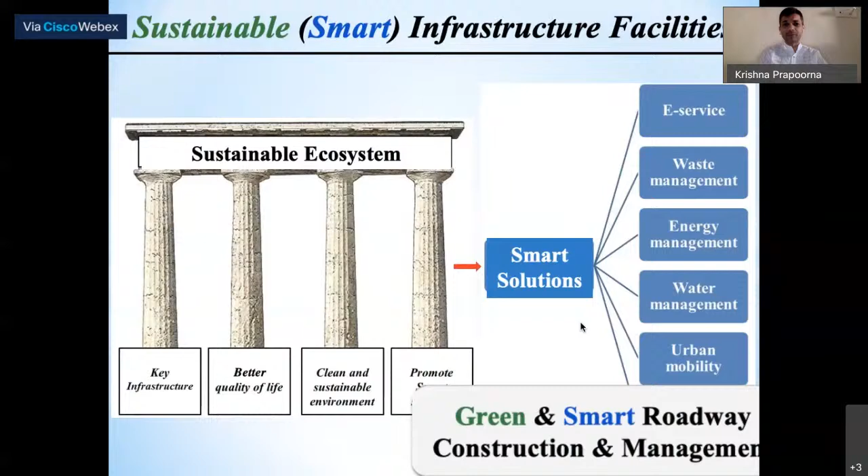And one of the other things is the transportation, where there are two important aspects. One is the mobility, that's the transportation traffic side. The other is the infrastructure or the material side, right? So there are two important aspects. So this presentation will talk only about the roadway asset management and the construction aspect. So we call that green and smart. So this presentation will only concentrate on this, not on the other things.

So I just thought I should share with you our group. So if you have time, please visit our website. We have a vibrant group. We have more than about 10-15 students now working together on several advanced pavement systems research areas. Okay, you can see our lab is well suited to do fundamental research, where we can do binder testing, aggregates, and also the mixtures, advanced mixtures.

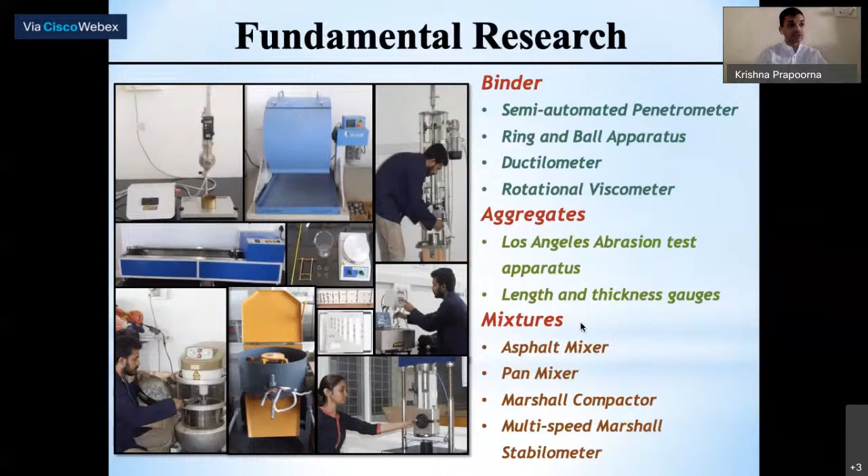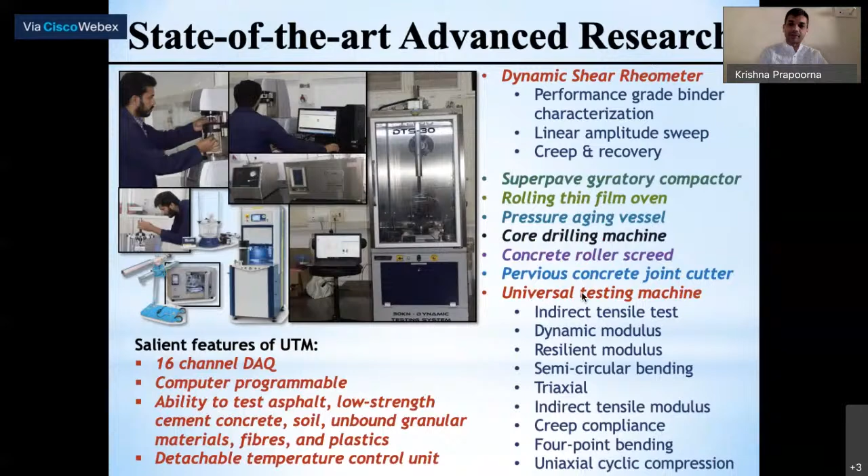We are coming up with several state-of-the-art products. Okay, when you look at the state-of-the-art advanced research, we have some of the best equipment in the country right now, and we are able to do all kinds of experiments, may it be tensile, compressive, fracture, fatigue, many other things. Okay, we also have come up with several research areas that you can see here.

Okay, one of the things that you are able to see here is the vehicle pavement interaction that we are currently working on with NHAI, National Highways Authority of India. And it's a larger project. It's a pan-India project that we are trying to do. We are also collaborating with several other academic institutions.

Then the other one is the environmental concern. That's something that's very close to my heart, because we have been working on this warm mix asphalt. We've also been developing some good products, which also will encompass rubberized asphalt, which I show you here, the asphalt rubber. That's something that I've been familiar with over the last 15-16 years now.

The other thing, of the two important aspects, one is the pervious concrete. We started all the way at IIT Kharagpur when I was there between 13 and 17. So we have now come up with some new generation pervious concrete products that we can show you a few glimpses of, but you can actually go and look at our own publications where we have more details on these.

The other thing that I thought we should share with you, and what I'll be presenting more within this presentation, is about pavement asset management. Right, we have come up with 5 or 6 modules using the deep learning techniques and also image processing. So they're all automated now. So we have been working very closely with the Andhra Pradesh State Road Development Corporation, APRDC.

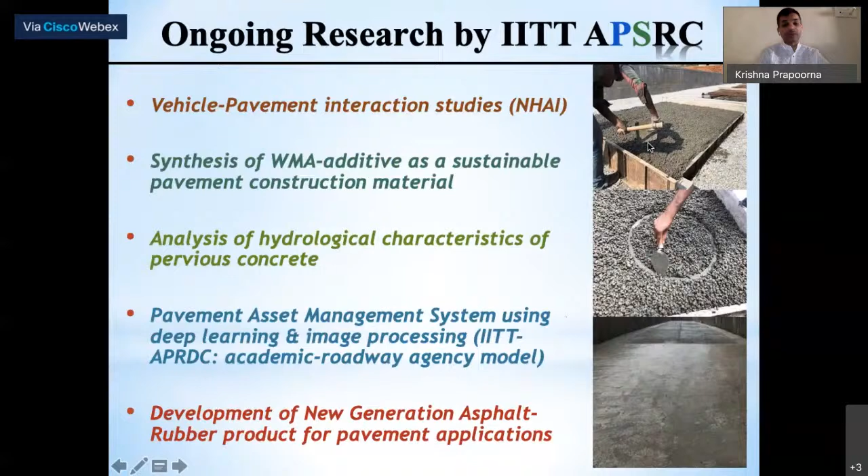So you can see some of the good pictures from our own products that we have placed on campus at IIT Tirupati. In fact, we made a small presentation last year in one of the other events on pervious concrete. So now coming to the conferences that IIT Tirupati is hosting, one that's coming up in 2024 is rubberized asphalt rubber. It's on the new products using rubber-based binders, asphalt binders. That will be hosted by us. IIT Tirupati will host it.

Then one of the other things is the international conference on smart cities. That will also be in India in 2023. One that's coming up very soon is in May this year, May 28, 29, 30. I'll share with you the next slide where you can see there are at least 30 countries participating across the spectrum. So what we are doing right now is to have good collaboration with the industry. We have APRDC, we also have CRRI folks with us, and many other centers collaborating with us.

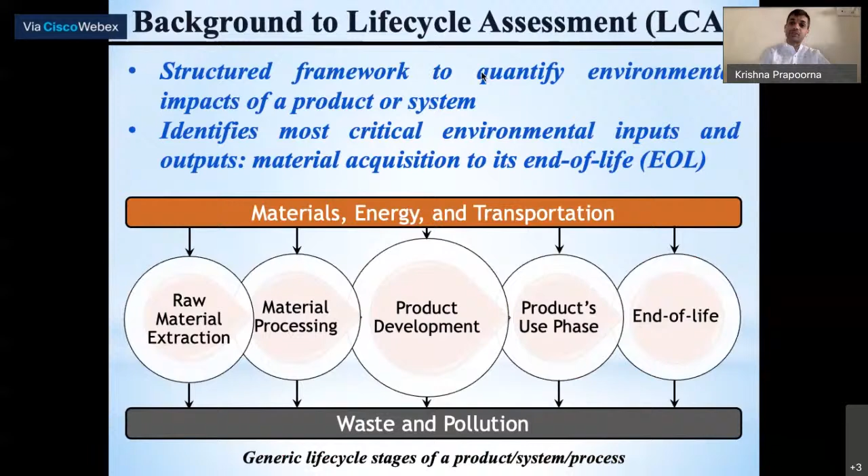So when you come up with a product, we should make sure that we also talk about the life cycle, right? Okay, so it's basically a structured framework that we created, and we were able to quantify. So that's something important. We were able to quantify in terms of numbers, so you could compare between the products, right? So if you look at these life cycle phases, there are 4 important things.

One, we have to be defining the problem, so we know what we really want from the outcome, right? So you need to be coming up with boundary conditions. So that's a system boundary, we call it. And then how many stages? So is it cradle to gate or cradle to cradle? So if you are looking at a material that's just being placed versus a material that can be reused after the entire design life, that's what we should be looking at.

And the analysis period. So how long will this product last? It could be 30 years, 20 years, it could be just 2 years. It depends on the product. So I'm just presenting to you a very generic aspect of LCA, okay? And the second thing is the inventory. So that's something very important. All of us have to be very familiar.

I told you in the beginning also, you need to be creating databases that could be used by others. And that should be open source. If that is successful, I think others can actually provide you good ideas, and you can also benefit from that. And you can also be producing new products, new solutions that could be used by others, right?

So you need to be coming up with the inventory. So you need to have that database, data bank, where you can have primary data from what you have done at your own lab, or you could be collecting from secondary sources, right? Which are literature, obviously, repositories. Then the thing that is very important here is the assessment. So is there a process to it? Yeah, so it all goes back to the fundamental principles, science, right?

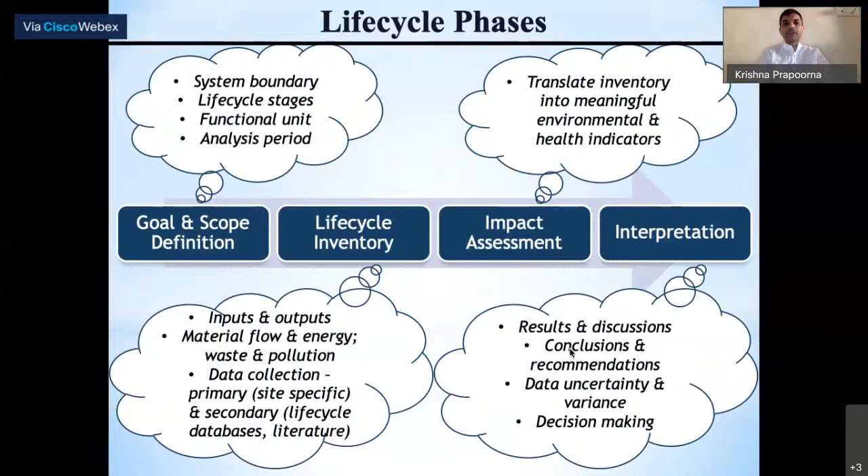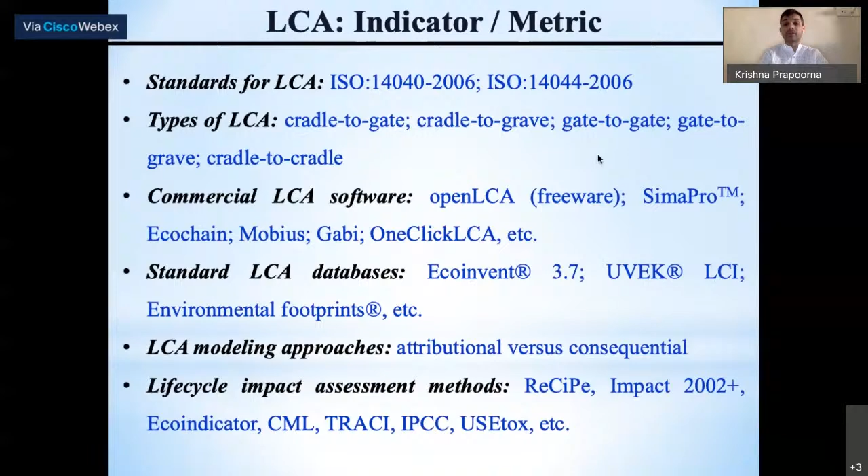So if you look at this, there are several standards for the LCA. I'm not going to talk about this because these are all out there. There are a few open sources. There are a few that you'll have to purchase. Obviously, they're all really expensive, right? So what we thought we should do is to come up with our own toolkit, automate that, so you're able to predict the assessment, right?

If you look at the urban cities, 20 to 40%, in a dense area, it could be even more. And there are two important impacts. One is the urban hydrological aspect, where we will see that there will be a lot of runoff, not too much percolation. We would like to have groundwater recharge, but then there is a lot of runoff going.

Then the other thing is, because of the concrete that's being placed around the city, there is that temperature differential between the urban and the rural setup. And that we call the urban heat island phenomenon, UHI. These are two important research areas for those who are taking this up as research. Please make sure that you target some of the things that are really in dire need.

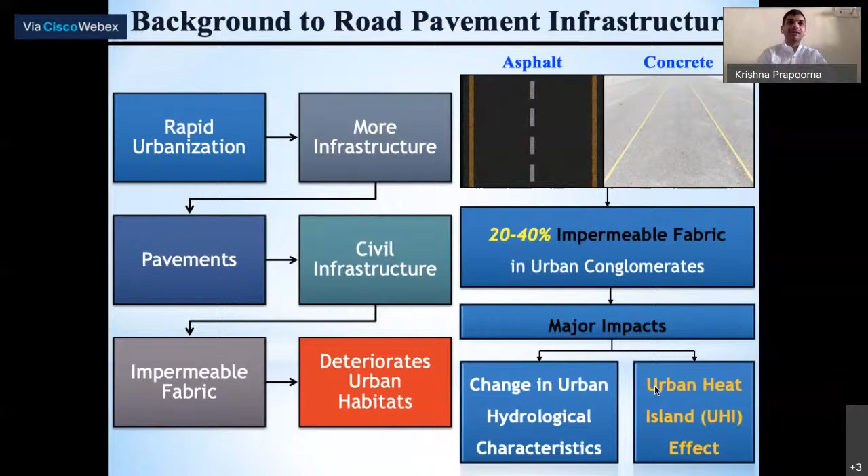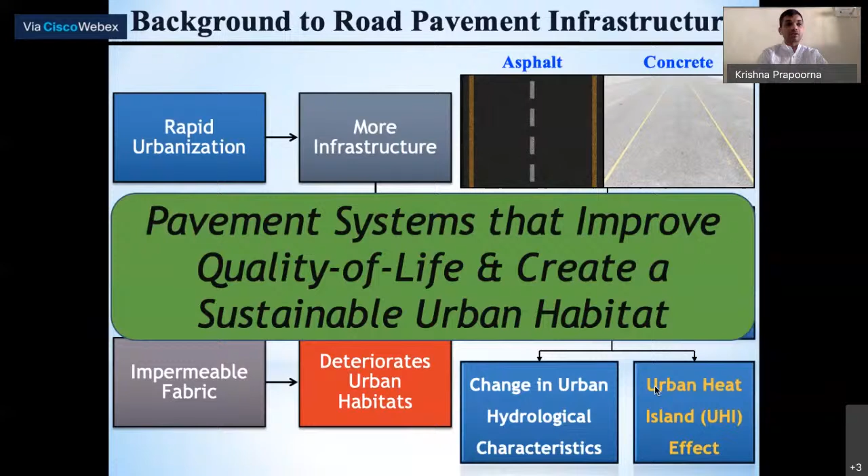So what we would like to create are those pavement systems that can not only improve quality of life, but also make sure that we have good sustainable urban habitat. So pervious concrete, I'm not going to go into details of this, but just to familiarize you. Pervious concrete is basically a specialty concrete, which has, similar to conventional concrete, aggregates in different sizes.

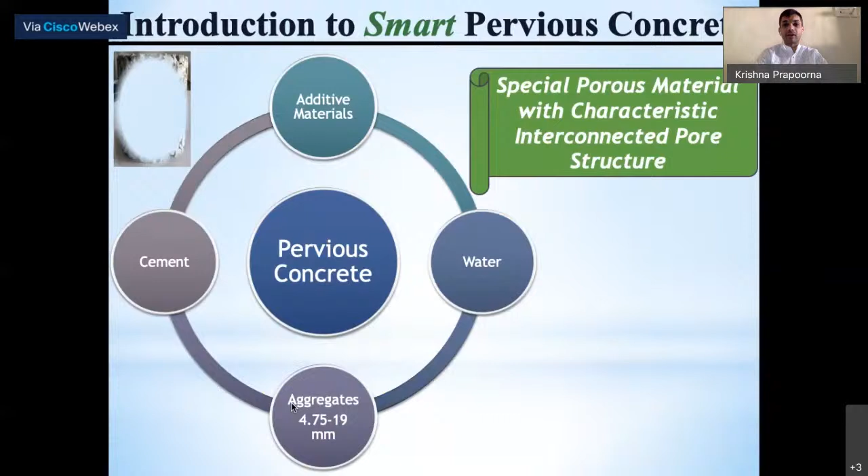But it is a very special material because it has an interconnected pore structure. It has limited or in fact no fines at all. So it's basically larger sized aggregates, which creates more porosity, or what we call void ratio. That 15%, 20% or sometimes 30% porosity is the characteristic feature of pervious concrete. And because of its high porosity, it also has low strength, which means it can only be used in low to medium volume roads at this point of time.

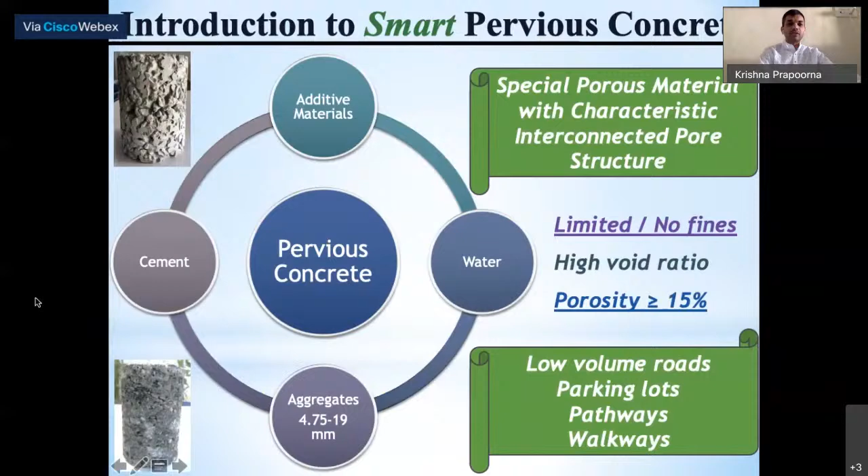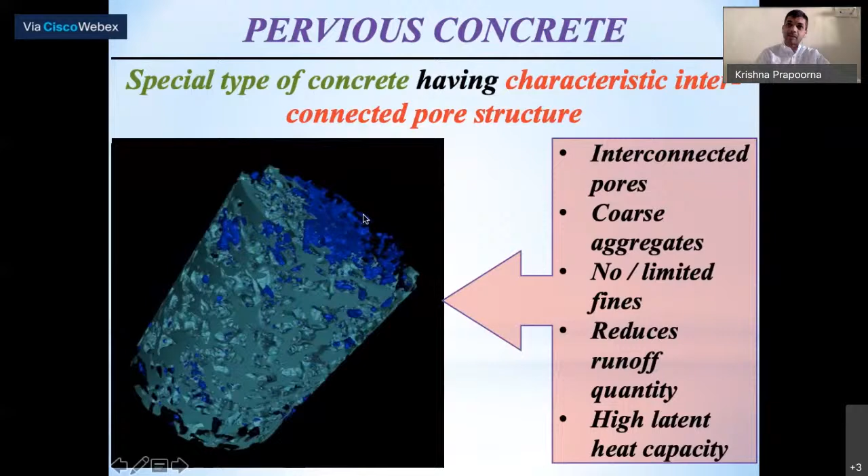There are two different pictures that we are showing from the lab. We have placed some test sections. Because it has an interconnected pore structure, we have done some X-ray microtomography and image processing. We scanned the images and found that the material can get clogged, obviously, because it has high porosity. But literature very clearly indicates that it can only get clogged in the top layer. How much thickness? Probably 1 inch, about 25-30 millimeters.

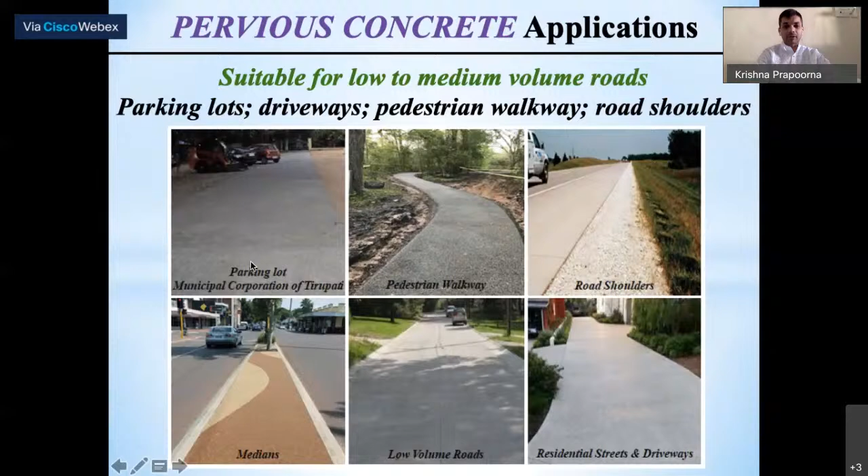Now, this is where we can use the product: low to medium volume roads, for example parking lots, walkways, medians and many other applications. One thing we did as a demonstration is to have a parking lot with pervious concrete on campus at IIT Tirupati. If you happen to come, please visit us. We will show you our sections. We embedded some pipes beneath the layers, and we were able to harness water. It's a published document if you want to read about that.

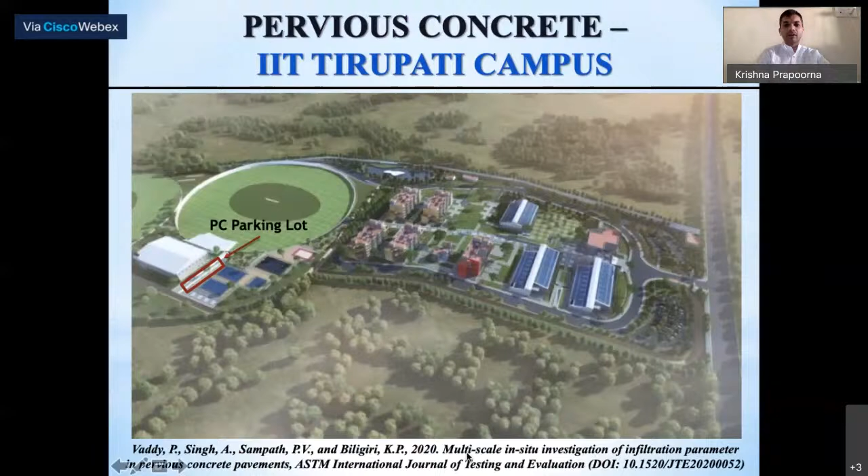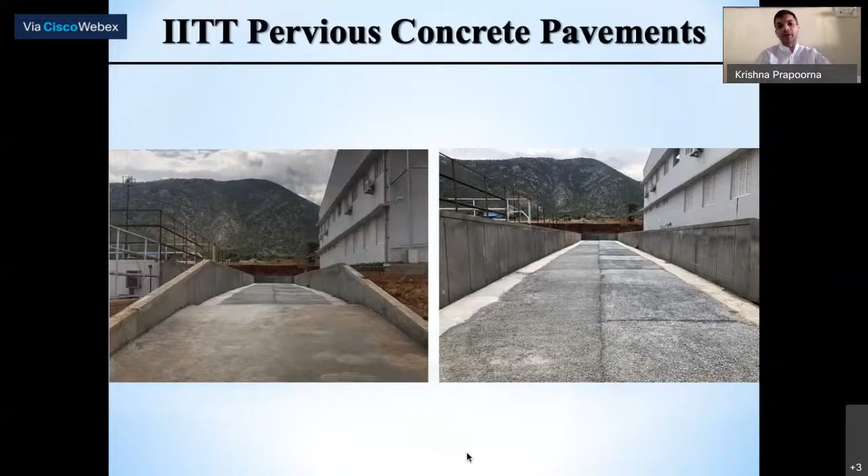Here is the picture where we had a 5 meter width and 15 centimeter thick section, and this is the final product. I'm not going into the details of these. The aim is to show you the LCA toolkit that we have developed. Here is the final product, and it's being used now as a parking lot. We wanted to understand how much emissions and embodied energy are within the product, and compare that with the standard product in the industry and the real field scenario, which is conventional concrete.

So we thought, let's calculate the embodied energy and also the kg CO2 equivalent. So we created a toolkit. It's an automated toolkit, and it goes back to the fundamental principles I told you about. You can go to open source software tools, or you can purchase LCA software that can help you calculate all of these.

But we thought we should come up with our own toolkit, because there was no other toolkit for pervious concrete. The idea here was to calculate these and also the capital cost required to place these sections. And we adopted what we call cradle to gate.

When we say cradle to gate, I told you this, that there are 2 or 3 or maybe even more: cradle to gate or cradle to cradle approach. But what we used here was a cradle to gate because we didn't have the end of life for this material, right? We don't know what happens after 8 or 10 years of service. So we approached this cradle to gate.

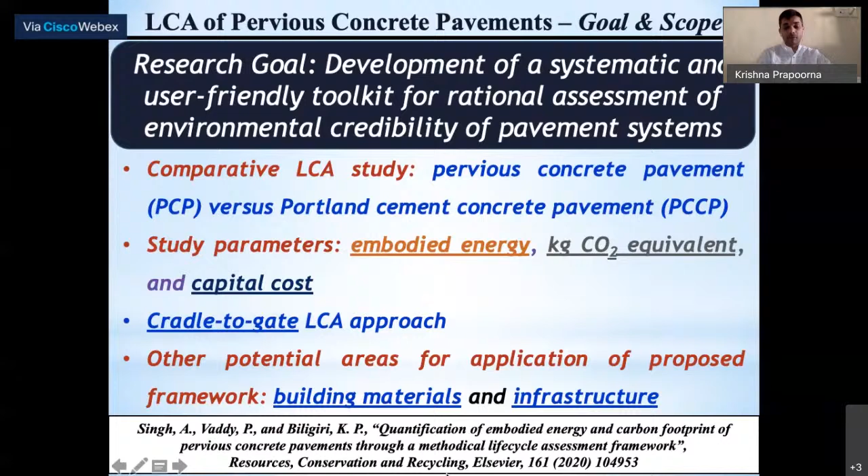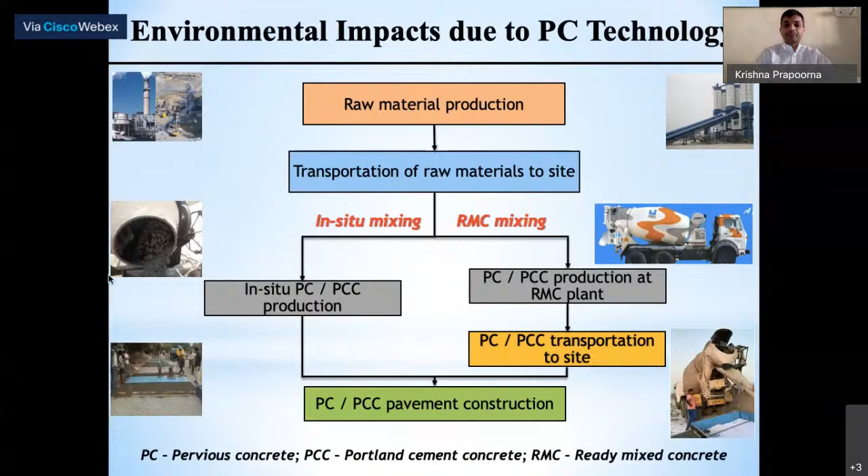So what we did here, you see here, we had this in situ versus the RMC. That is what we were trying to compare. And again, compare 2 different materials. One is a pervious concrete, and the other is the conventional concrete, with 2 different processes that we can create this technology, right? So you can see in the slide, one thing we wanted to have was an extensive amount of data that could be used to create those equations and also calculate.

So we had our construction agency, the contractor, help us with the data. Okay, so the primary thing that we had was the construction agency itself. So we had the contractor help us with the data, raw materials, and then the pervious concrete, and then how much water did they use, what was the water cement ratio, and all those things that we got from them.

The other things that probably we didn't have was the global warming potential, right? And the embodied energy for some of the things that we never could get from the primary source. So Central Pollution Control Board was one of them. Okay, that is a secondary source. And then the material, for example, the ordinary Portland cement that we had, the 53 grade, and then the crushed aggregates. I told you there are different kinds of aggregates that we used, and also it had a range.

Now, the other thing that was important was the target compressive strength. So we targeted an M25, and we were able to achieve that also. So the range of values that was achieved in the field was anywhere between 10 and 25 megapascal. The real field sections I'm talking about. Okay, so we kept this as the target for our calculations. And here you can see there are 4 different scenarios that we were looking at. And I told you we were comparing 2 different mixing methods and 2 different materials, right?

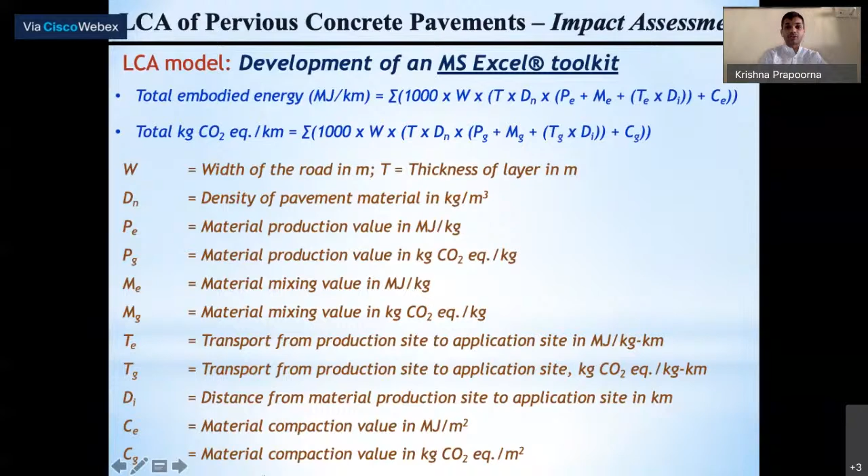And then material properties, so density, and then the production value. Again, these are the values that we either got from the agency or from the secondary data source. So all of these we got from various sources, and then finally we arrived at these simple equations, automated now, right? And if you actually see, all of these are very generic in nature. You should be able to use it for any product of your choice now. That's why I told you in the beginning, this kind of a study that we did was probably aimed at looking at many other building materials as well, right?

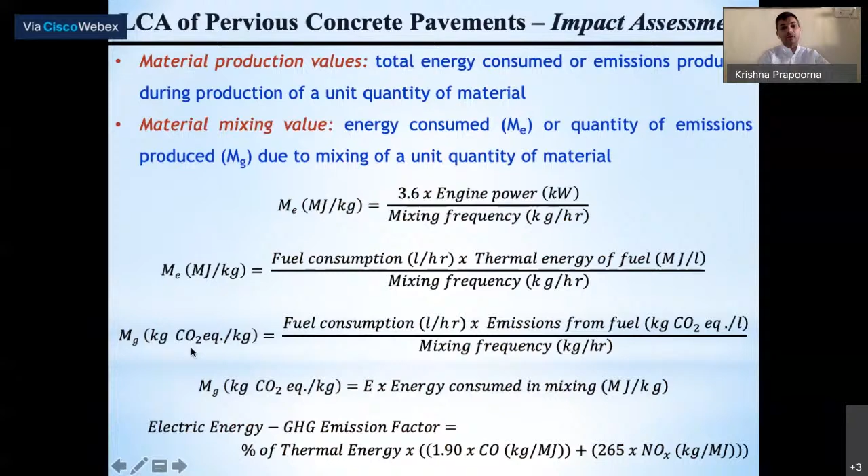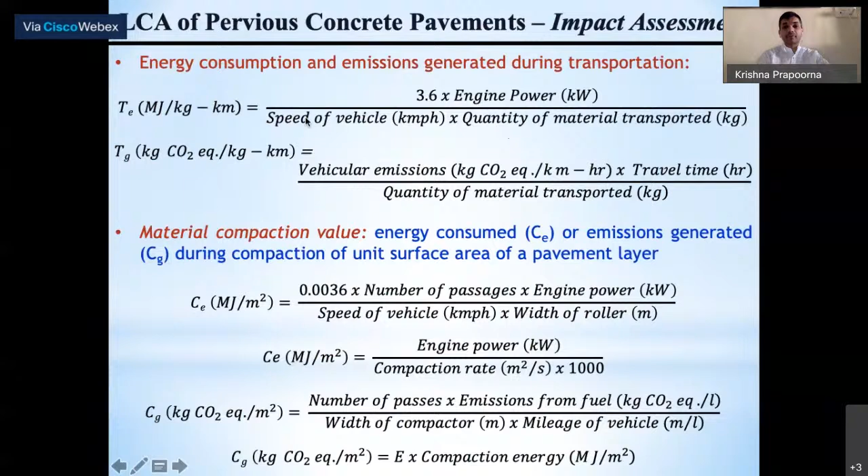So here are some of the things that you might want to look at later. Okay, we also wanted to have the energy consumed calculated, emissions generated, and many other things. You can look at this, all of them are here. Okay, now looking at the results. Now, if you want to interpret the results that we had, there are two important things here.

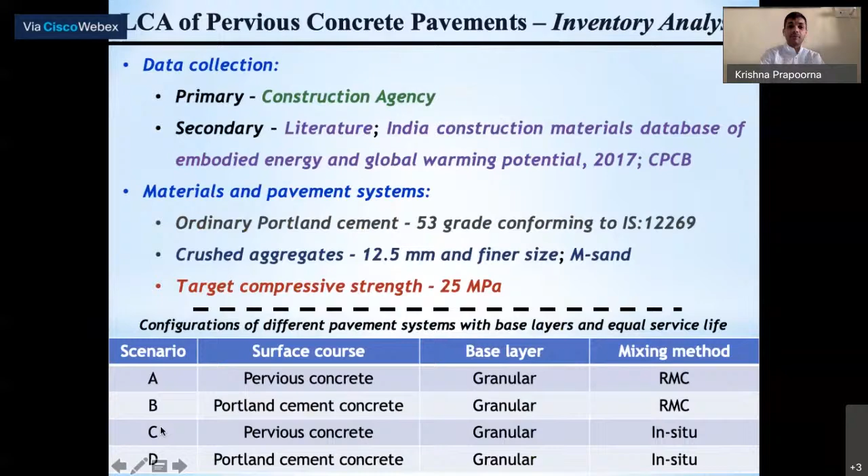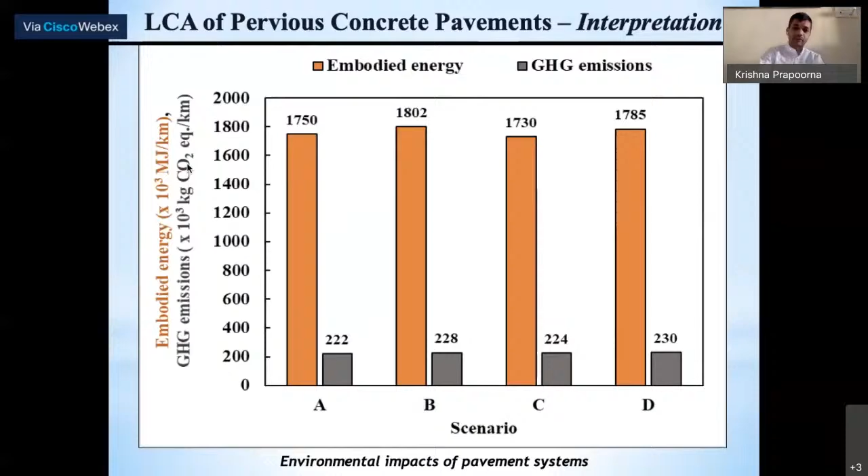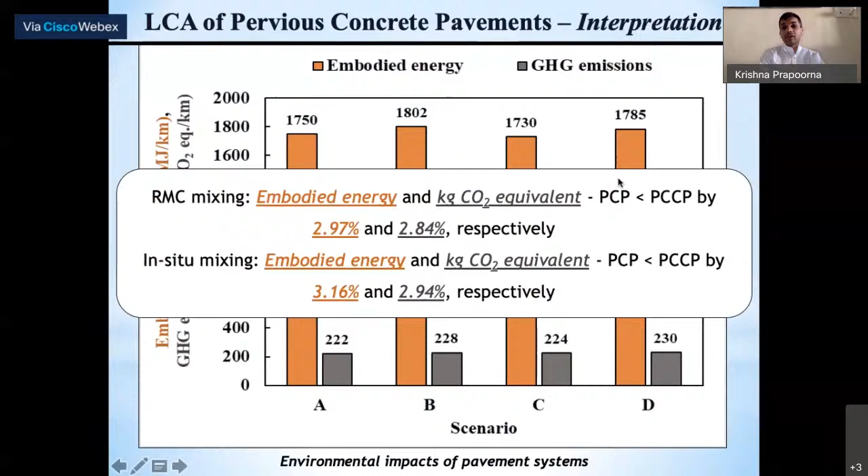Now, coming to sensitivity, because along with the automated toolkit, what you should be doing is to come up with the sensitivity. Which factor is more important than the other? That's something very important, right? We wanted to look at the transportation distance, material production, mixing, compaction, and density. So you are looking at the entire phase, cradle to gate. Now you can extend this to cradle to cradle. If you have the salvage, you can also include that for sensitivity.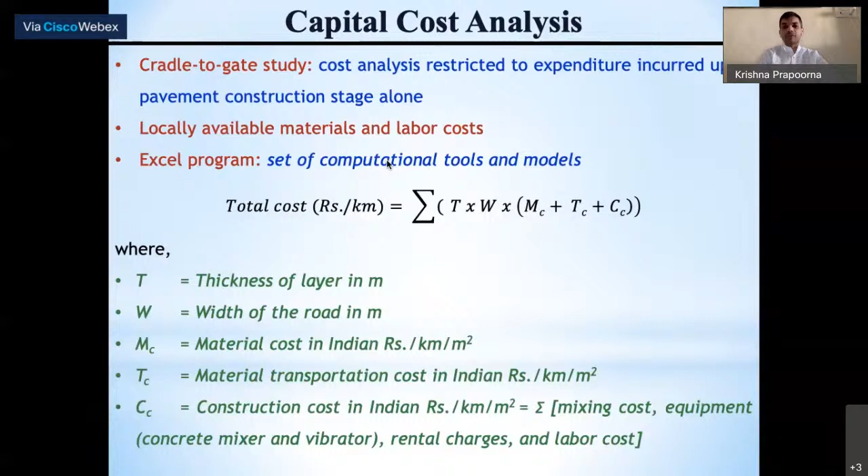So you see again the different parameters that are there. You can modify this; the computational tools can be modified and further refined based on your input. So finally, if you look at this again, A and B RMC, C and D in situ, A and C pervious concrete, B and D cement concrete, right? I'm looking at whatever number I have times 1,000.

Rupees. So you should be able to save a lot of money due to RMC. That's what this says, and that goes by fact, right? So you're able to prove through your toolkit that what is found in the actual market is correct. And that's why I told you, you should be able to create your own toolkit using simple MS Excel also, or maybe even a simple tool other than this. Okay.

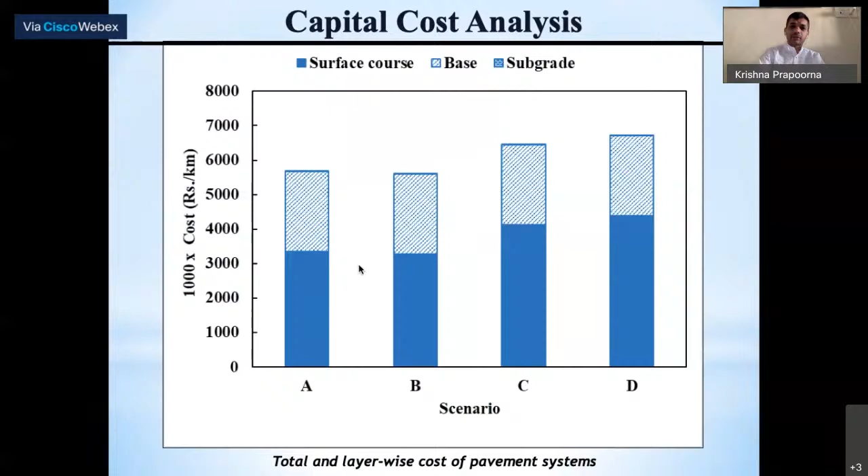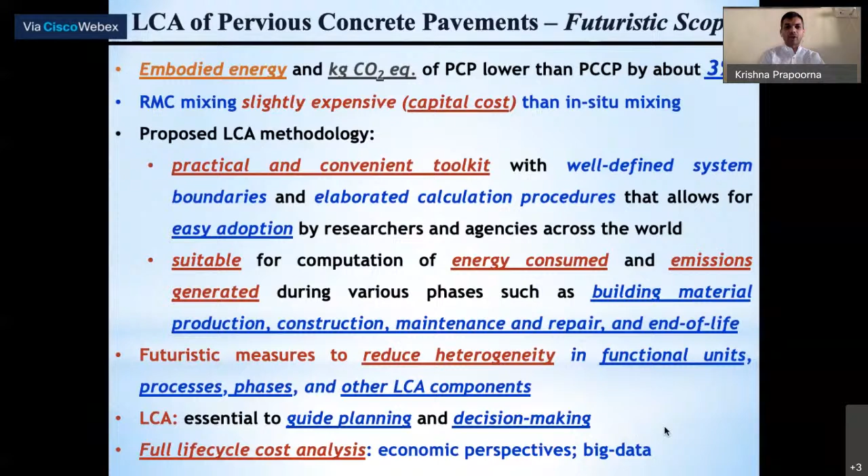So coming back to this again, what we are trying to do with this toolkit is extend this to LCCA. So please work on this, come up with the economic perspectives. Full life cycle cost analysis has to be done on that, right? And that's where the big data comes in. One of the things that we are working on closely with other colleagues right now is to have target mixtures, and use the artificial neural network to calculate and then integrate that with our toolkit. So that's very much possible, right? So this is one thing that I thought I should share with you.

The second thing that probably will be more interesting for all of you is the pavement asset management toolkit, right? And we have now automated all of them. We have about 5 modules that we have come up with, and let me share with you all of those, because, as I told you in the beginning, it's the academia industry model that we're working with. And this toolkit can straight go to the roadway agency and can be used by them.

Now, one of the things that all of us are familiar with is database management, right? If you are not able to have a good database, it's really difficult for others to use this. And one thing that you should understand is manual survey versus automated, right? If you are surveying in the field and you have to do thousands of kilometers, it's laborious and time consuming, right? So an automated system will help us not only to store data, but also reduce the amount of time. So it saves time, but also saves money. And you can simply sophisticate your toolkits with that money, so you're able to invest more on this.

Now, let me just give you a background on pavement asset management. Definitely pavements deteriorate like us, they also age, right? And if you are not addressing the problems that occur during the entire design life, it could be cracking, pothole, rutting, shoving, corrugations, you name it, it's there on road, right? If you're not able to address those on time, not maintain, then what will happen? It'll deteriorate faster than expected. That is what you see here.

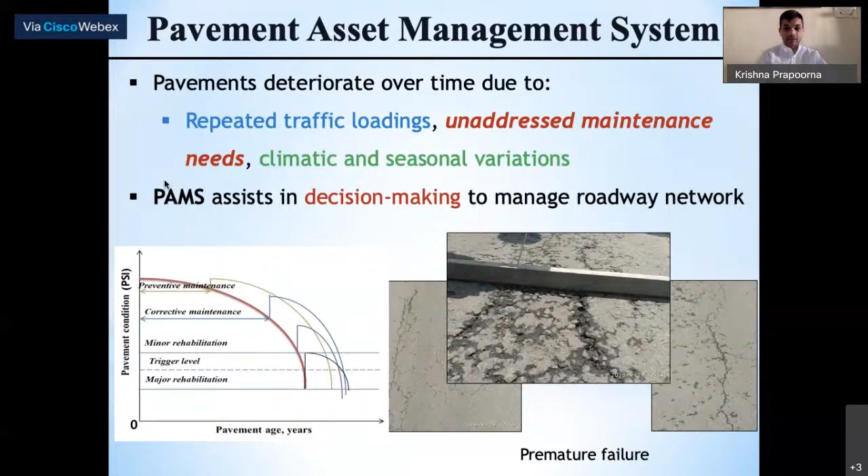One of the things that we haven't done in India yet, at least many states have not done, is to have this kind of road management system database. Even if they have those, they have not automated them and are not capable of predicting the performance. So that's where our automation of these toolkits comes into the picture, right?

So giving you a brief history of PMS, pavement asset management, it all started in the 1950s. The AASHTO road test came up with the serviceability index concept, present serviceability index, which is basically the difference between the initial and the terminal serviceability indices. Then they came up with pavement management systems for highways, and that's a systems engineering approach. They got the survey done, whole to part, right?

So you do the survey, go to the field, get all the data, culminate that into a database, come back, and create a software toolkit that is automated, obviously, that can predict for you the performance of the system. Now, how robust the system is depends on how sophisticated you make the program, right?

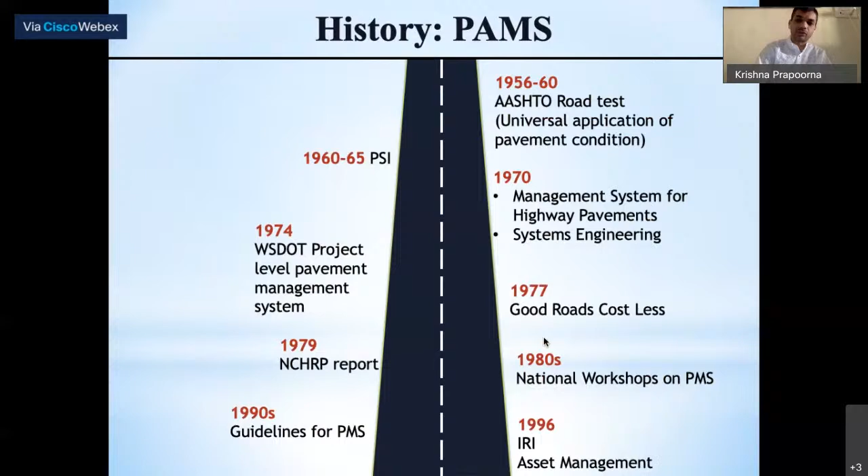So if you look at the overall picture of the PMS and the objectives, right? One, definitely you collect data. It's a circular thing, you see. You collect performance data, right? You see today and then you collect every year for the next 10 to 12 years, or it could be 20 years, it could be seasonal, it could be monthly. You create that database and then you automate that.

You should be able to detect distresses automatically. You cannot go there every time, and you cannot do that for thousands of kilometers, right? You should be able to just get the images or videos through your automated van or vehicle, come back to the office, and detect distresses using tools, right? And then the tool should also be able to analyze. Finally, predict the performance. That also you should be able to do using the tool.

And then come up with the alternate rehabilitation strategies. Not only that, you should go one step further and come up with the cost comparisons. That will help you prioritize and optimize what you would like to do. Finally, implementation. That's where the construction comes into the picture, right? So this is the asset management and the construction. They both have to go hand in hand, right?

So another thing that is important in this asset management is you come up with the alternatives. Your module should be able to do that for us. If you're able to tell the roadway agency, go with this maintenance strategy because this is probably the most appropriate for this section, then you have succeeded in convincing the agency, based on actual data, images, right? This is what we should be using, alternative A instead of alternative B, right?

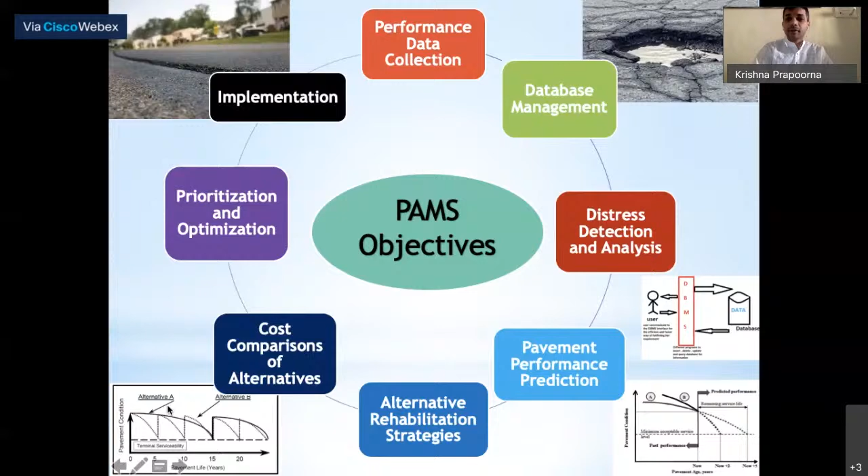So now looking at this picture here, you should be able to come up with the acceptable limits also using your toolkit.

Okay. Finally, you should be able to tell the user, okay, you just have to input this and we will give you the performance prediction. If you're able to do this much, that'd be great.

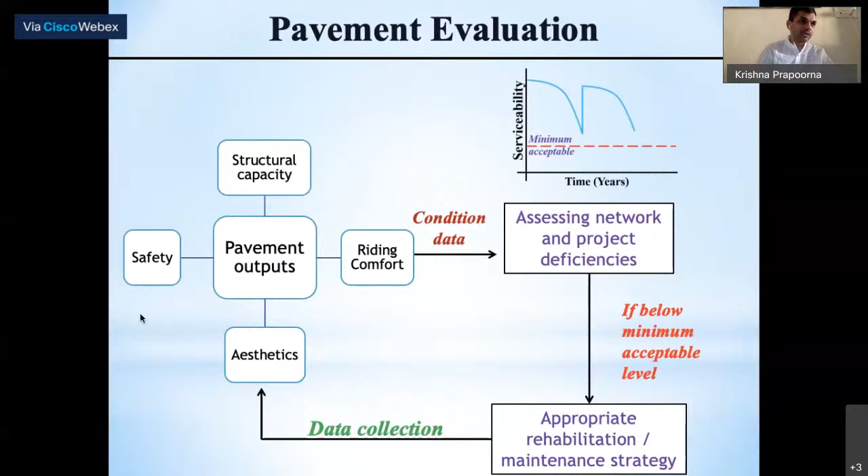So now when you look at the different vans that we have, right? I'm sorry, not the vans, just vehicles that we have. There are different kinds of vehicles across the world to do the condition survey. Okay, there are a few. Manual survey obviously is there with us. Most of us are familiar with this, but then there are automated vans.

There are cameras embedded on the van, on the vehicle, below the vehicle to capture the profiles, right? They're all laser based sometimes, and then also image based, right? So you should be able to get familiarized if you go and Google those.

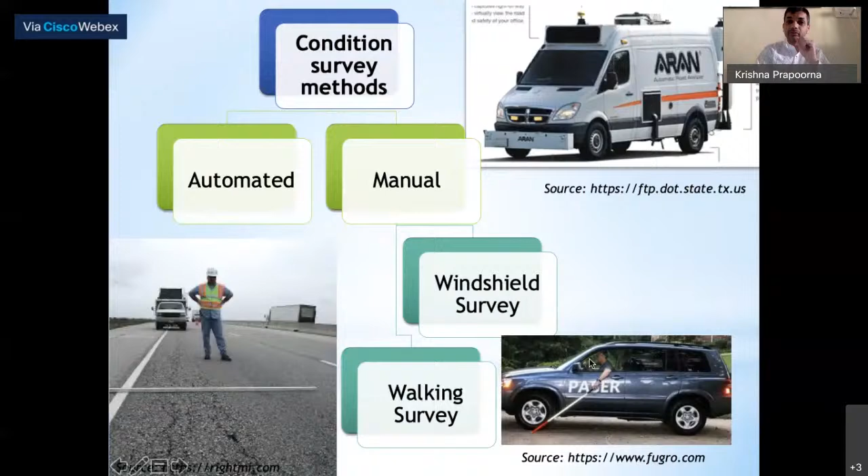Now, one of the things that is there in India and what we have been using, and now coming back to our own work, is the network survey vehicle that is there in India, and that was basically manufactured in Australia. Because you can see here ARRB, the sophistication of the toolkit that's there, which can collect data, not the performance prediction, obviously, that came from ARRB, the Australian Road Research Board.

Okay, and what is the special feature of this van? You see here there are 3 different cameras that are mounted on top of the vehicle, and then there are cameras mounted below the vehicle also that can capture the pavement profile.

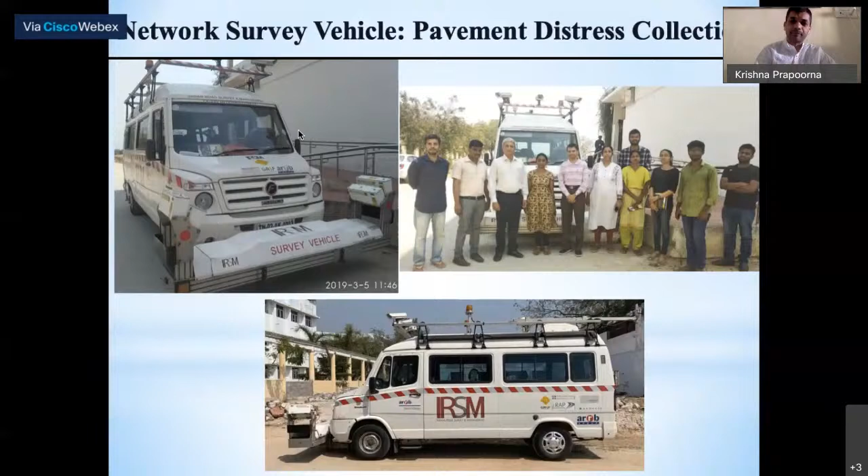So we have data coming from AP state, Andhra Pradesh, almost 13 to 14 lakh data points. So they gave us this much data. So we are now closely working with them and giving them the toolkit that we are developing. Okay, and you see here what are the things that they have done. They have basically captured all kinds of distresses. Fatigue cracking, pothole, rutting, shoving, bleeding, many other things.

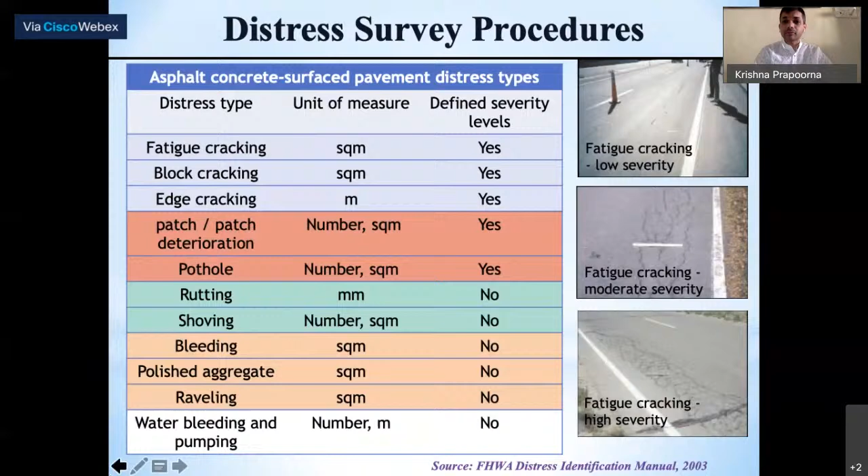How are they able to capture that? I told you, not just based on the manual survey, but also due to the automated one. So that is able to capture that.

Now, if you really want to understand what pavement asset management is all about, please go to one of the papers that we just published recently in Automation in Construction journal. One of my students actually did this. She's now finishing up a PhD. And one thing she was also successful in is creating different modules within pavement asset management, right? And there are about 3 or 4 things that I thought I should share with you.

One thing is we were successful in detecting potholes using the artificial neural network, and quantifying the amount of material that is required to patch the pothole. Second thing is a very large scale study that we did using 3 different data sets across 3 continents, and I'll share that with you also. So we are able to predict several distresses at the same time.

And we are able to predict real-time distresses if you use any vehicle for that matter, not just the NSV that I showed you. You should be able to go out in the field, capture the video, come back and use our toolkit. Automatically, it will detect for you all kinds of distresses, approximately 18 of them.

The third thing that I thought I'll share with you is engineering criteria-based pavement condition index. That's something important because most of us are familiar with manual. You go there, you take a paper and pen, you do that. It's good if you have 10, 15, 20 kilometers or maybe maximum 100, with enough manpower.

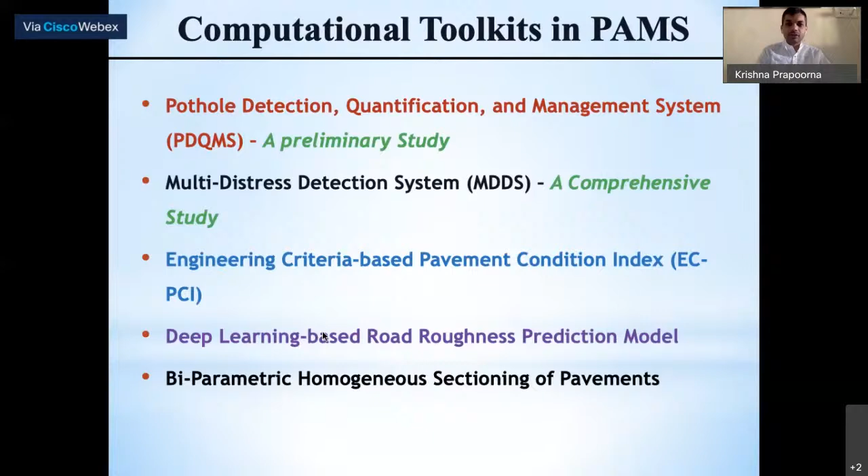So the first thing that I thought I'll share with you is the PDQMS, pothole detection, quantification, and maintenance management system.

That is a published document. If you want to know more about it, please let me know. We will share with you. One thing you people are very familiar with, all of us, right? Potholes are definitely detrimental, and they can probably create accidents. I'm just saying probably, because there are a few potholes that will not, but there are a few extreme ones that can definitely do that for you.

So you should be able to predict the pothole, right, using images. That is what we should be able to do using automation. That is the first objective that we had. So we wanted to predict the pothole and also come up with the amount of material that is required to patch these potholes. So I'll not go into details of what a pothole is, because all of us are familiar. So it's a published document there.

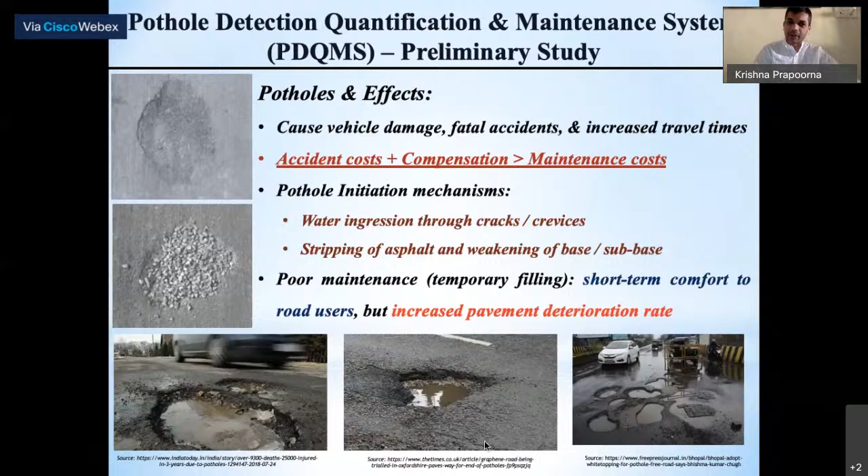So we created a framework using You Only Look Once. This is an open source software. Okay, it's version 3. So what we did, we created an architecture based on images that we collected. Okay, it could be colored or grayscale, no problem. So we collected the data set, and then we created an architecture in the open source YOLO, and we segmented those potholes from the images.

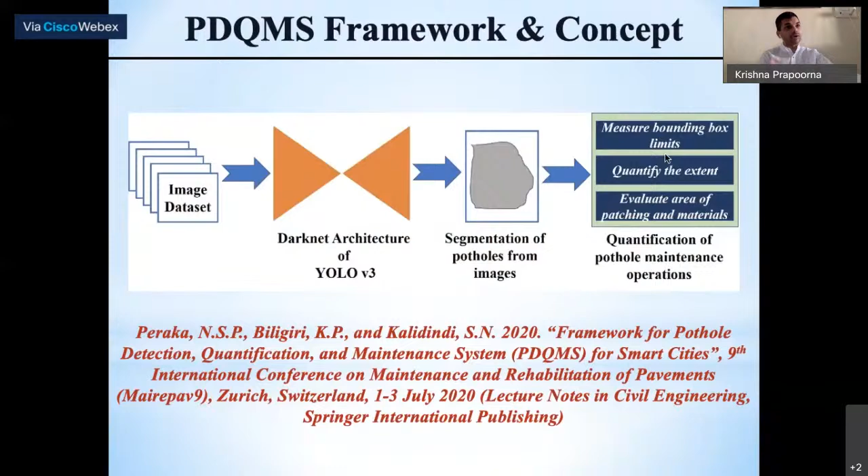So you have an image, and you might have 3 or 4 potholes, but your toolkit should be able to automatically detect the bounding boxes, the boundaries, right? So we were able to do that, and then the quantification of the extent of pothole. So not only severity of the pothole, which means depth of the pothole, but also the extent of pothole, which means length and the width. Finally, come up with the quantification, right? So here is the slide that can give you more information.

So we had different depths of potholes. I told you just a while ago, right? And what we did, we classified those, and we labeled those into 3 different classes. So we had 9 different classes to start with, and then we came up with 3 important ones: low severity, medium severity, high severity. So these are the labeling. So our automatic network is able to not just detect the pothole, but also label the class. So that much we were successful.

So you see here, the procedure is as follows. So you have the original image coming from the roadway section. Okay, you can use an NSV to do this. So you go to the field, you capture this image, come back, pre-process it. Why is pre-processing required? Because you need to convert those to the desired pixels, right? Okay, and then, another way of looking at it, you have this image. You see here, this is the pothole. I don't know if you're able to see this. This is the one that I should be able to capture. You have to create that bounding limit, right?

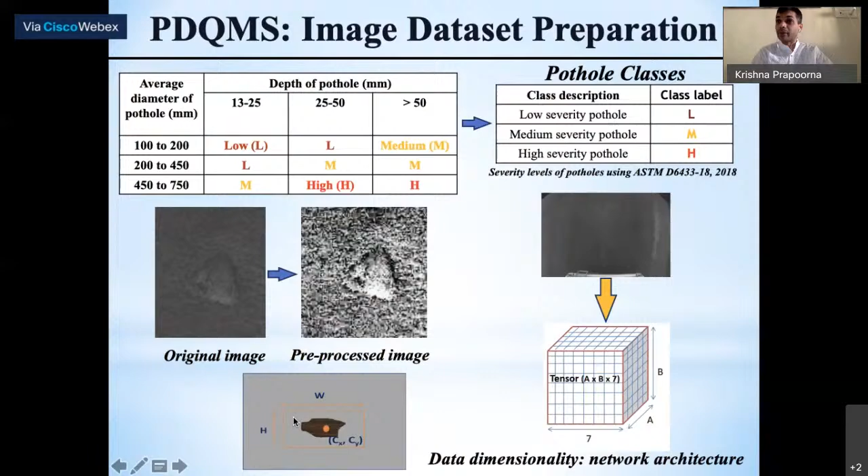So we use a tensor quantity there. So it's a data dimensionality, in the network architecture itself. And then we finally came up with the width and the length of the pothole along with the depth of the pothole. 3-dimensional, right? So here you see another way of looking at it. So we got this image from the database. Here is a pothole, you can see that. So put that into the architecture.

So it basically takes up the image, and then there are different layers. What it does, it simply creates that bounding box around this pothole and labels it. If you see here, it says L, which basically means low severity pothole. Okay, if it were M, it would be medium severity. H, high severity, right? So it's able to predict that using the architecture and the fundamental principles that we used. And finally, it simply gives us the bounding box and the pothole here. You see, that's what it gives.

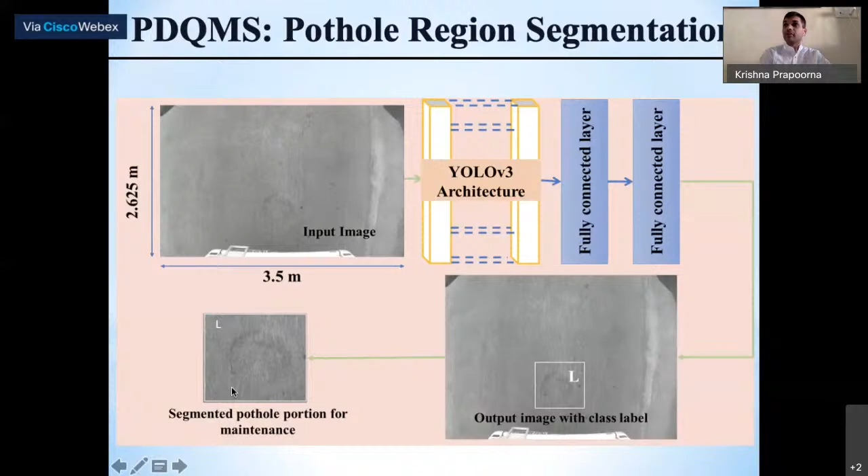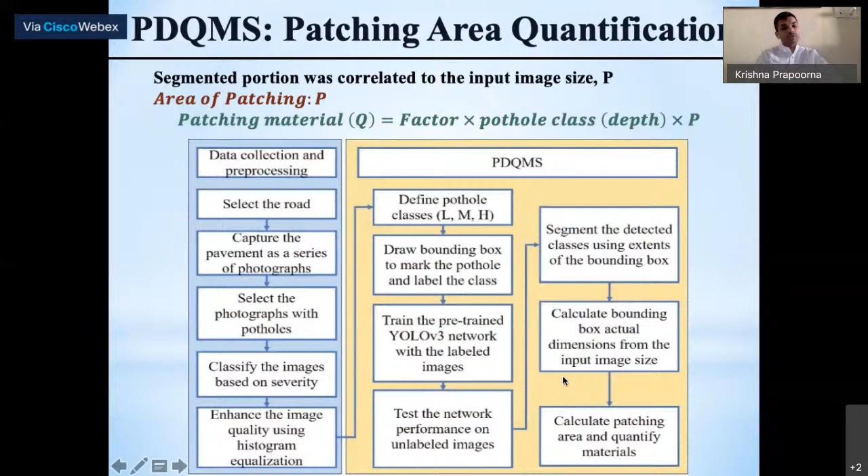And then you should be able to calculate the amount of material that is required to patch this pothole. So here is what we did. These are the chronological steps that we followed to get into the pothole patching there. Okay, and then looking at the results, the statistical parameters. How confident are we with our product? Look at this. The mean average precision is very high. In fact, 89% plus. It's slightly higher than the existing one.

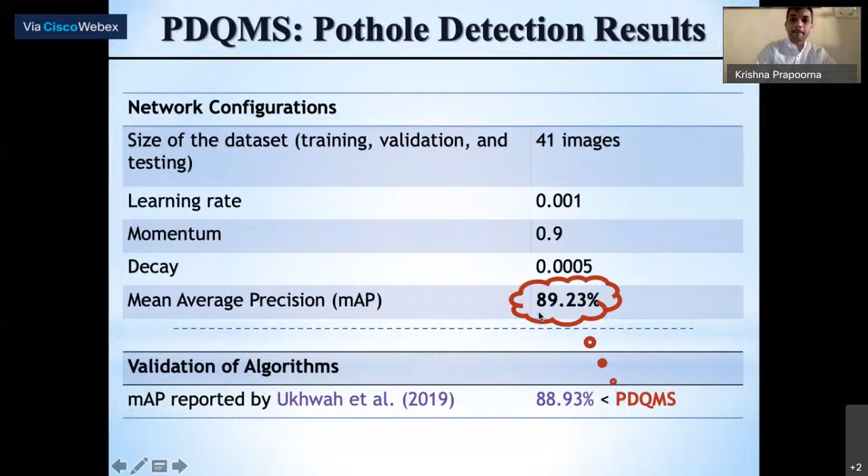Okay, in literature. So we used about 41 images. Now we have probably gone even beyond that. I'm not going to share that with you because it's still not published. But we have trained, validated, and tested on 41 images. That's something that you should be familiar with. And you can see here, this is really very high, right? Okay. Now, the next thing that I thought I should share with you is the multi-distress detection system. And I told you this is a massive work that we did for the state.

Now, we were able to detect 6 different types of distresses and 3 different severities, which means 6 times 3, 18. 18 different distress classes automatically, right? And what we did, we used YOLO version 4. Again, it's an open source software. It's one step advanced than what we did for the pothole detection. That was version 3. This is version 4.

We trained and validated on diverse data sets. Again, I'm going to share with you the different data sets that we used, and it was able to detect real-time videos also. So if you're using this toolkit, you run your video into the architecture, not just image but also the video, you should be able to detect different distresses at very high computation rate.

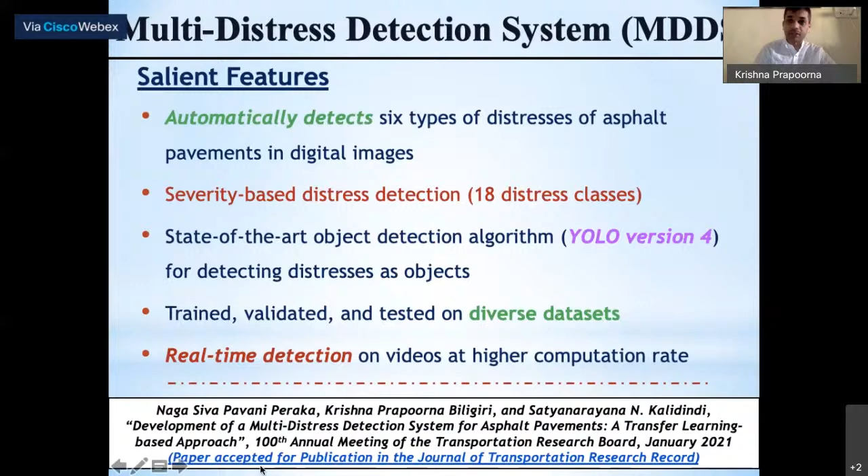It's a published document now. It was presented in the Transportation Research Board meeting, and it's a published document in the Journal of Transportation Research Record. It was accepted. It's now getting published very soon, maybe in the next one or 2 months.

Okay. So what we did, you see here, this is what I thought I should share with you. So there are 3 important things. One is the passenger side camera, front, and the driver. There is also one more, which I'm not able to show you here, the one that is below the vehicle. Okay. So apart from these 3 that we got, videos and images, videograph we call it, right?

We also got this information from the APRDC. Distress rating forms that we got, different distresses that they thought were there based on the survey of about 50-60,000 kilometers using the NSV, and the other indices, deflections and the trial pit studies and so forth.

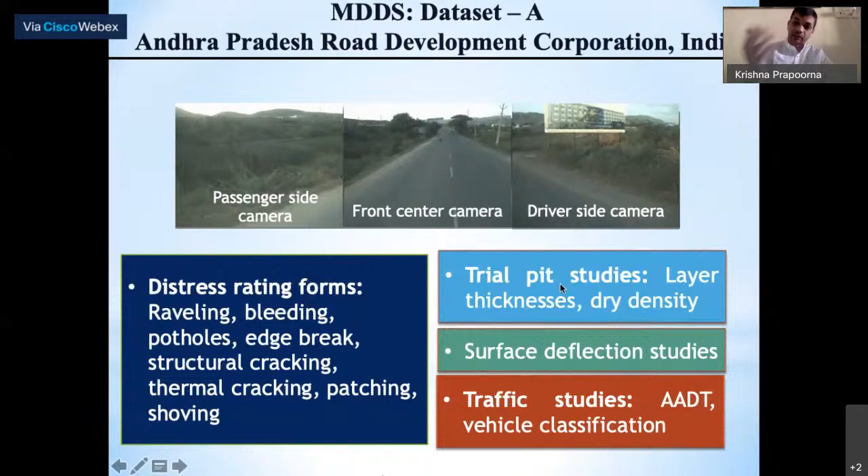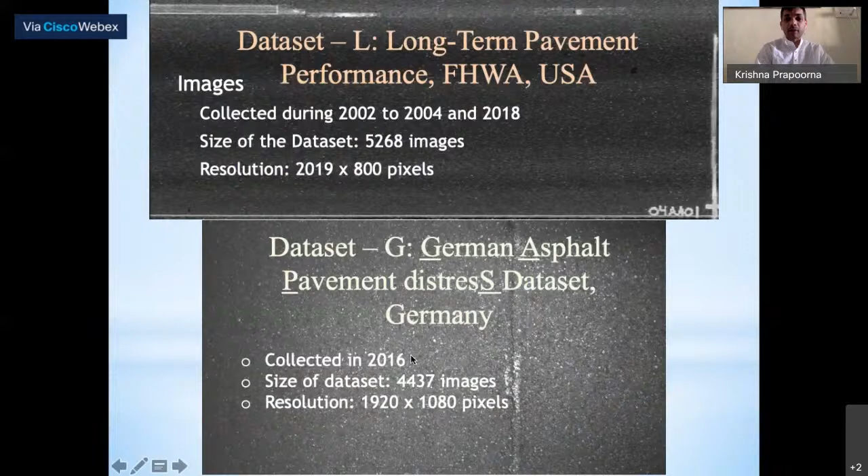Okay. And 3 different data sets that we used. One was the long-term pavement performance database coming from the Federal Highway Administration. So there were about 5,200 images, all the way collected from 2002 until 2018. And then the other one is an open source German asphalt pavement distress dataset from Germany. About 4,000 plus images here.

And the other thing is our own APRDC images. It was about 100,000 images, and the number of images that had potholes, the distresses, were about 800. Okay, so in total we had about 1,500 images to work with from a large pool of data set.

What we did, we pre-processed all of these videos and images. We filtered those. We converted the colored ones to gray. We filtered those again. It could be video, it could be an image coming from the data set, it could be both. Whatever is the case, you first have to convert those to gray, pre-processing, that's what we call it. And then we enhance the image for the network architecture to read it. That's something important. So we worked with these 1,500 images, and this is what we got.

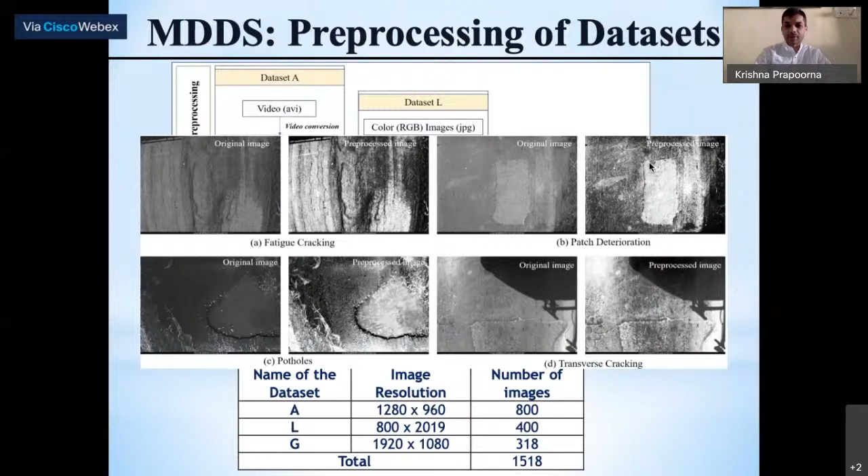So you see, this is the original image we had. We pre-processed it, original, pre-processed. So you should be able to see visually what kinds of distresses are there on these sections, right? First step. Second step was to come back and integrate with the LabelImg tool, because I told you it's not just detection, but you should be able to label those, pinpoint and tell, okay, this is the distress, this is the extent and severity, correct?

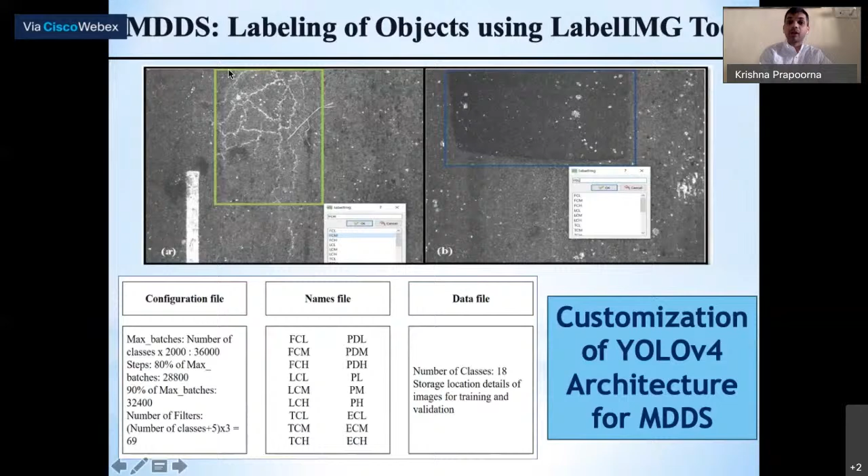So we had 18 labels that we created. So we customized the architecture, and we were able to detect and put the bounding box around it and also label those. So I'll show you some of the things. So we had about 1,500 images. You can see here, this is the published document.

Now we have gone further, and this is a number that you might want to remember, we have close to 97% now based on additional images that we added in the last 6 months. And the average loss has actually come down much further. So loss is much lower now than 1.5. So the mAP is now more than 94%, 97%. Okay, so here you can see all the different kinds of statistics.

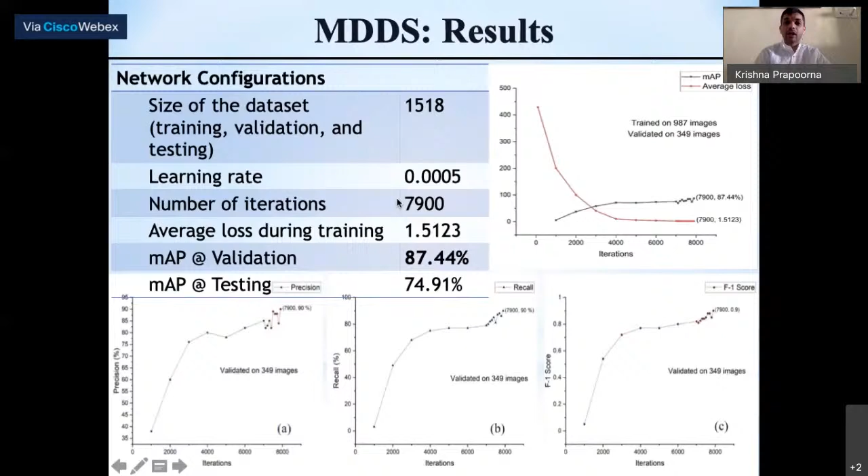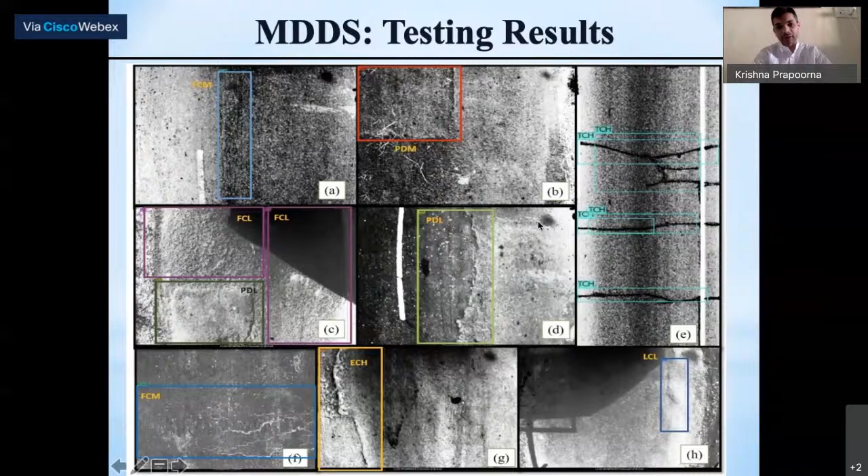Now, the third thing I thought I should share with you is the distress engineering criteria indices, PCI, Pavement Condition Index. I told you, if you are not able to provide a rate of deterioration, you will not be able to come up with the maintenance strategy, right? That's part of the pavement asset management. So you should be able to capture the type, extent, and severity of the distresses in any segment that you have, correct?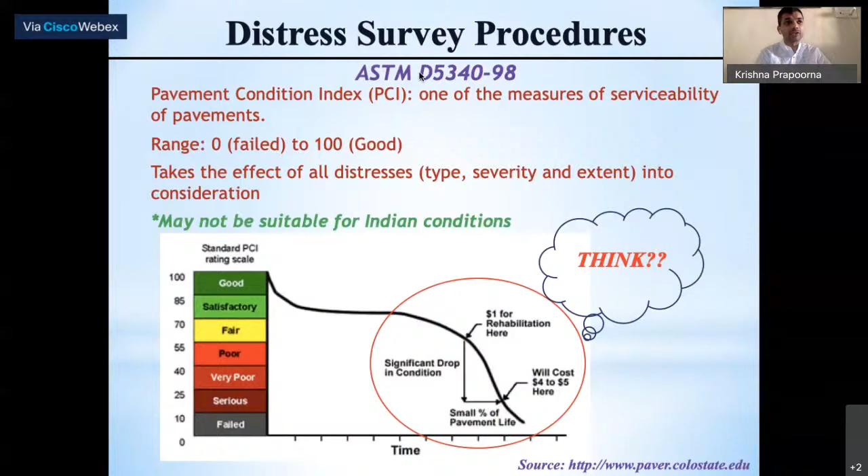Now, there is a procedure that is there in ASTM, American Society for Testing and Materials, and that's well utilized for parking lots. But is it really compatible for Indian conditions? So we came up with our own criterion. We call it engineering based criterion. Okay, and we did it across 100 kilometers when I was at IIT Kharagpur. It's a published document in ASTM journal.

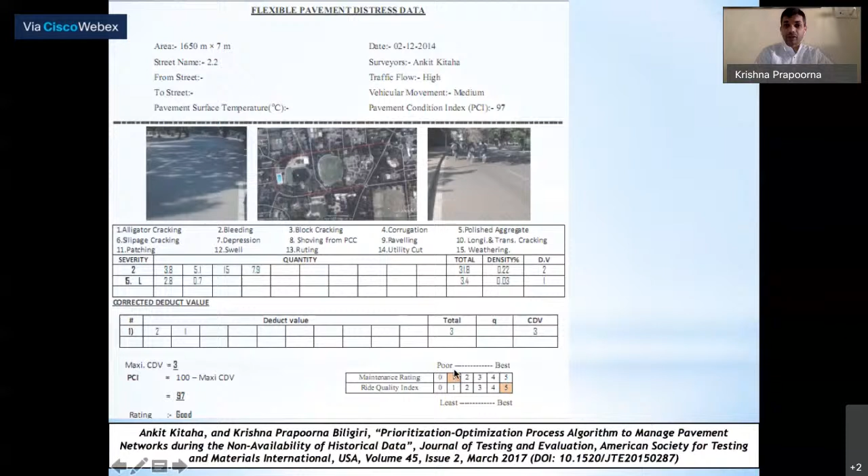Okay, we came up with this data sheet, went to the field, we did manual survey there. And we came up with at least 15 distresses for each of the segments. So we segmented those 100 kilometers into about 40 or 50 sections, and we came back and then rated those sections as well. We came up with the rating based on deduct value curves, something like this.

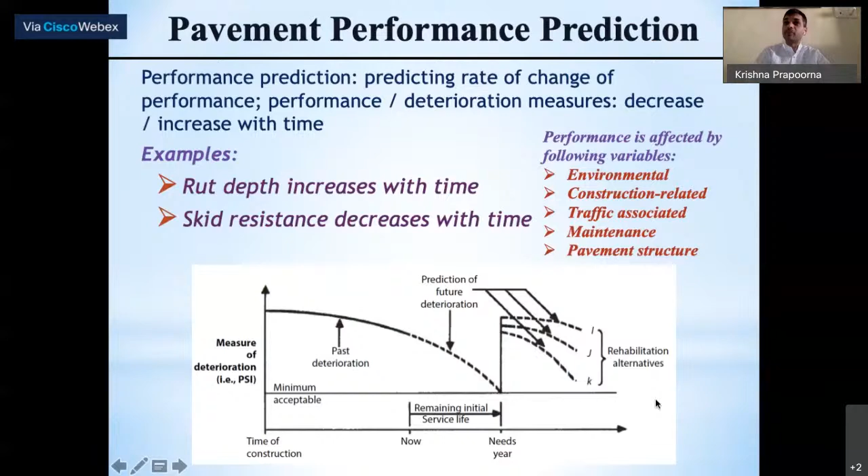And then finally, we came up with the engineering criteria for each of the distresses based on the deduct value. Okay, you can go there. And then the final outcome was the acceptable limit beyond or below which the pavement section is considered failed. Okay, so that is what we did using simple MS Excel toolkit.

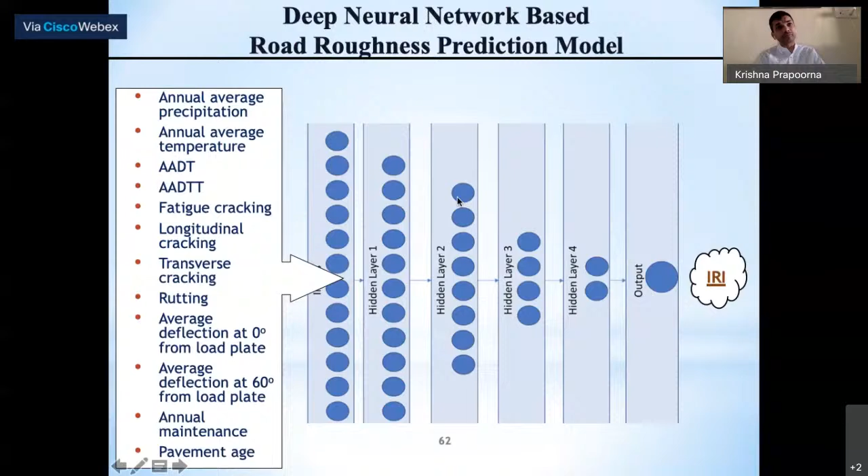Fourth thing I thought I should share with you is a deep neural network based road roughness prediction model. What we did here was to have data coming from the long-term pavement performance database in the US, and we were able to predict the international roughness index with all of these parameters within our neural network. So it was a deep neural network that we used, and we were able to predict the roughness. So we have gone one step further. It was recently presented in a conference at IIT Bombay.

Okay, and you can see here the mean square error, it's really low. Actually, it was 473 data points. Now we are expanding that. We have much better values now, much lower errors, I should say.

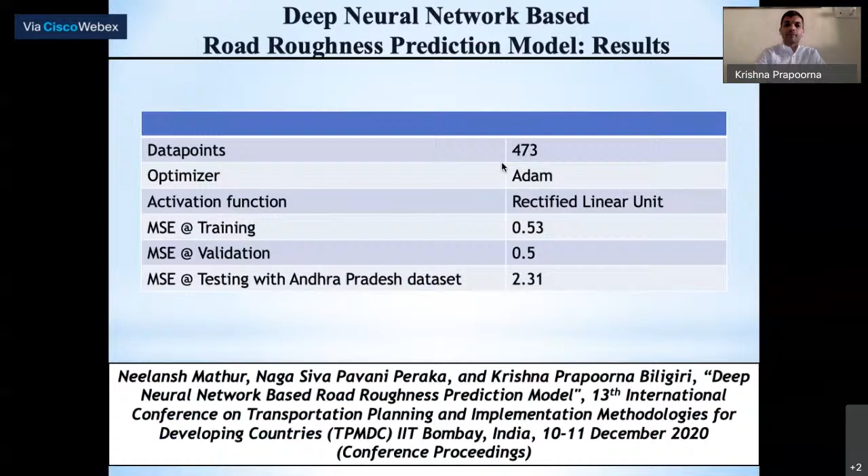Okay, and the last thing that I thought I should share with you is the homogeneous sectioning. This is something also automated now, and we have done it for entire state of AP. We are just showing to you maybe a couple road sections in this presentation. So what we did, we went and looked at the literature. The existing literature says that we are able to predict only one parameter. It could be rutting or roughness. We said, okay, we will go ahead and predict one more with our network architecture, and we were successful, in fact.

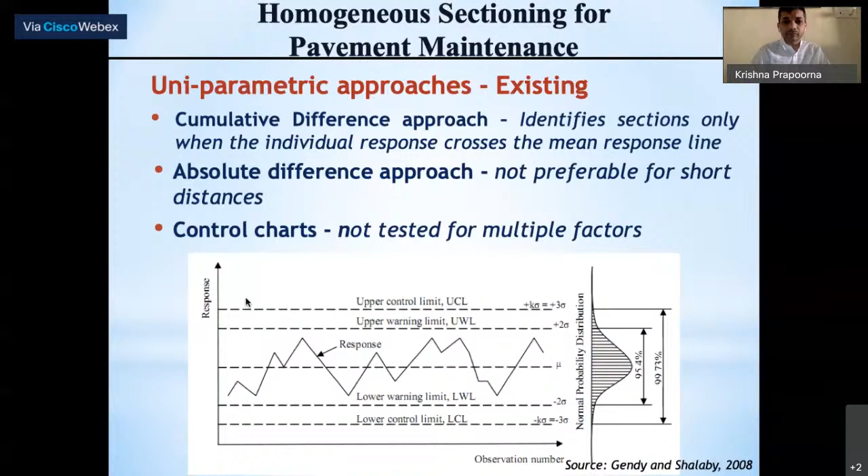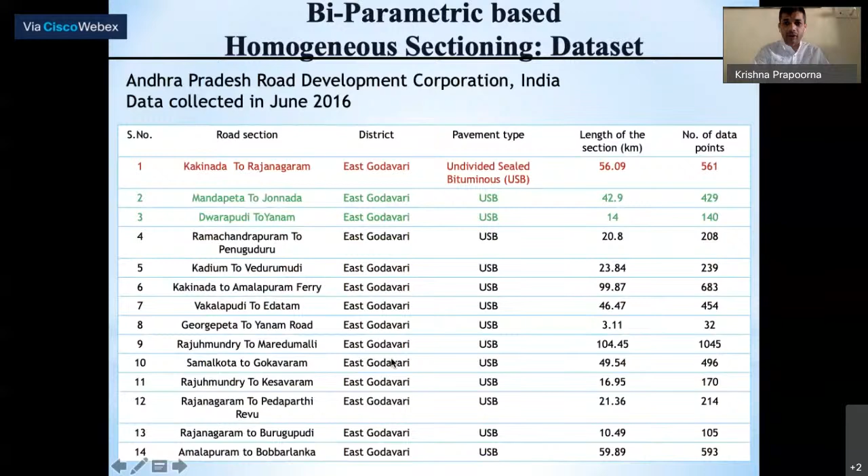So we used these kinds of charts. Some of you might be familiar with the C charts, quality control charts. What we did, we had database coming from AP for all the different districts, 13 districts, and several different pavement types. I'm just showing to you one screenshot. We had long sections which we divided into homogeneous sections based on two important things. One, rutting, the other is the roughness.

So far, people have either done rutting or roughness. They haven't done biparametric approach. So we were the first people to do that. And then you can see that we came up with the control limits with simple terminology called SPERN. That basically talks about both rut and roughness with respect to the corresponding means of those magnitudes. And we were able to segment those stretches based on that. So you can see it's really very good. The variance was good. It had very good R square as well.

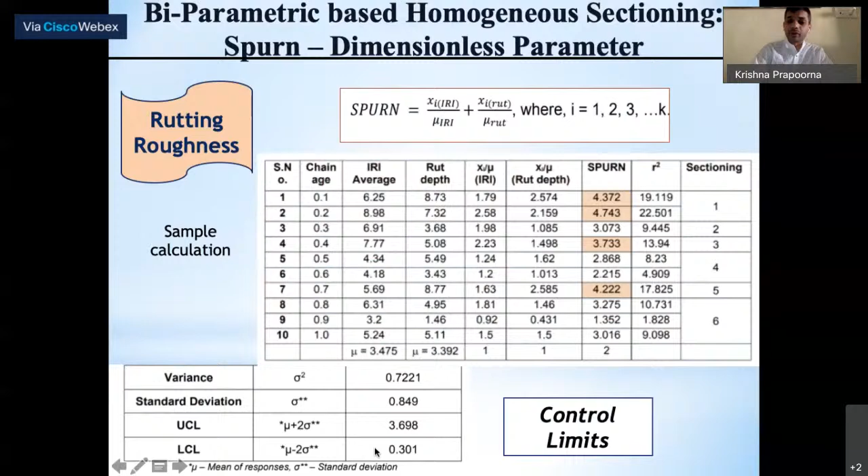The final outcome of this study was to classify the pavement types into different segmentations based on the spurn value. I told you what spurn means. It depends on what kinds of values we have, the rut depth versus the roughness value, right? And we came up with sections that were good, moderate, poor, and alarming, four different sections. And we also came up with the indicative treatments for those kinds of distresses.

If it was good, we just do preventive maintenance. If it was excellent, nothing is required, right? If it was a 0 spurn value, then you don't have to do anything. If it's slightly greater than 0, then you'll have to do something to it, right? If it was much larger, then you have to go for reconstruction. So we color coded those treatments and also the distresses. This is also a published document, in fact, recently presented.

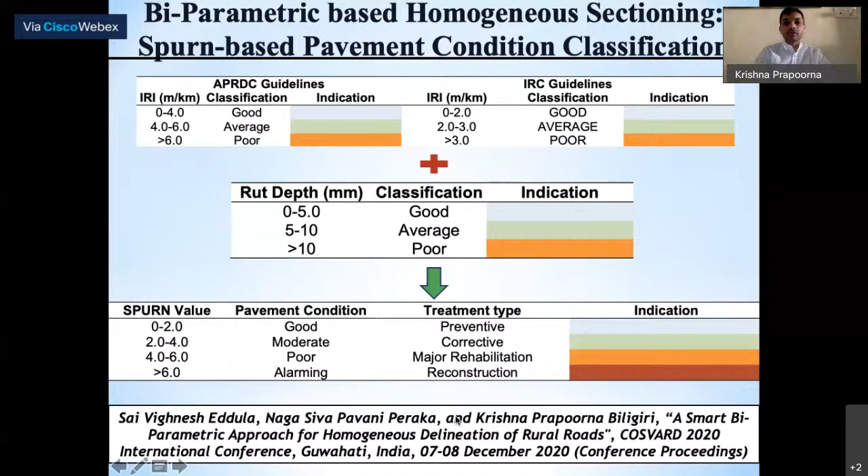So finally, I thought I should share our expectations coming from the automation of whatever we have done so far. We have advanced further, but I'll be able to share that after it has been published. We would also like to have automation in terms of prediction. We are now just showing you what we are able to capture as distresses, detect distresses, segment the sections. But what we would like to do also is to have performance predicted using the automated toolkit. We are now in the process of doing it, and I'll be able to share that with you in future presentations.

One thing that we showed you was the LCA, life cycle assessment. But one thing you should be able to advance yourself in is the life cycle cost. Consider the entire life cycle and compare not just the initial cost. To compare the life cycle cost, you should have the entire data of the service life. Only then will you be able to do it. Otherwise, it's difficult.

One thing I really want to urge all of you is to please get in touch with industry if you're an academician. And if you are from industry, please get in touch with academic partners. Let's work closely; it should be a mutual thing. Only then will we be able to have better roads in the country. And it has to be a long-term performance goal. Most countries have done this, and we have enough resources and manpower. I think we should be able to do it as well.